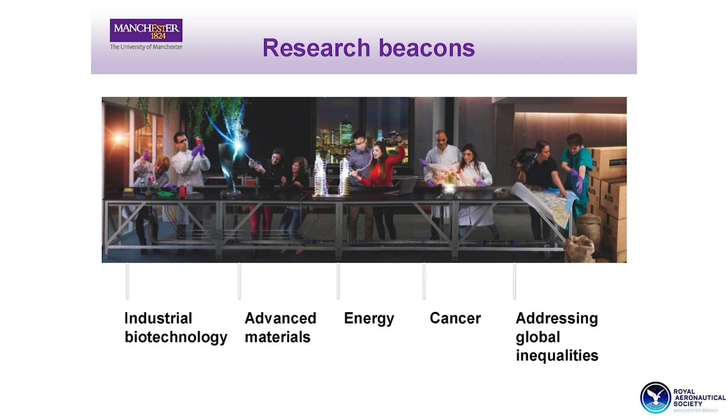Manchester, I have to say a few things about the university. It's Britain's first university of the industrial age, dating back to 1824, with 25 Nobel Prize winners. Rutherford split the atom there. Almost 40,000 students, and we have exceeded 1 billion of annual income. We have identified research beacons: industrial biotechnology, advanced materials, energy, cancer, and addressing global inequalities. But tonight we'll focus on advanced materials.

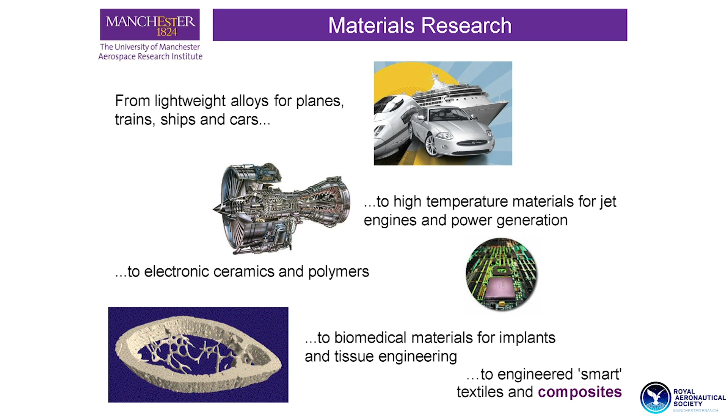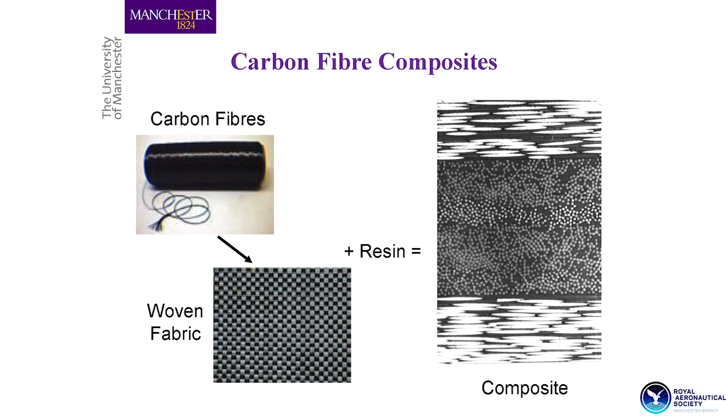When we talk about materials, we go from lightweight alloys for planes, trains, and cars, to high temperature materials for jet engines and power generation, to ceramics and polymers, biomaterials, to smart textiles and composites. But we are going to focus a bit more on polymer composites reinforced with carbon fibers, and on high performance carbon fiber composites with continuous carbon fibers that we can weave into fabrics and wet with resin in a multi-layered configuration to develop composite laminates, where we can design for strength, stiffness, and toughness. We can tailor the properties of the material system to our specific needs.

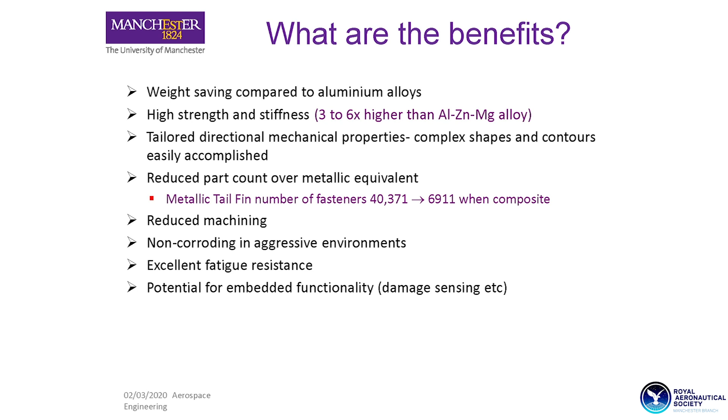Of course, what are the benefits? There are many. They are super light materials, offering high strength and high stiffness, 3 to 6 times higher than traditional aluminium alloys. We can tailor the properties, reduce the part count substantially, require less machining, and they do not corrode in aggressive environments. But most importantly, we can embed functionality, and we'll talk about that later tonight.

They are used in many sectors: aerospace, energy, wind energy, marine, construction, transportation. But compared with metallic materials and metallic structures, they're relatively new systems. The first commercial product appeared in 1983, when Dunlop produced the first commercial product, the carbon fiber tennis racket, which was an expensive item to acquire. Then in 1995, McLaren built the Formula One from carbon fiber composites.

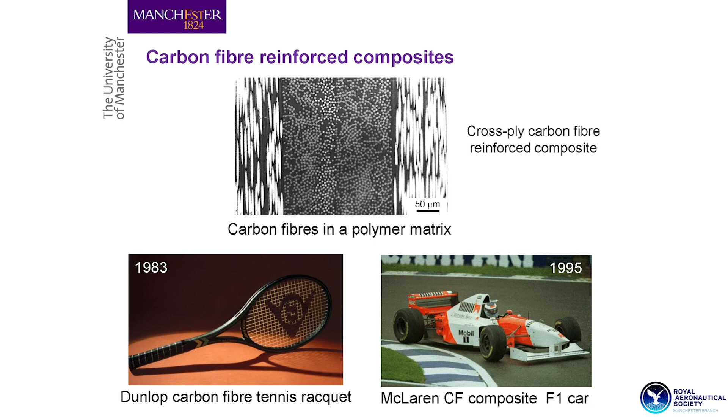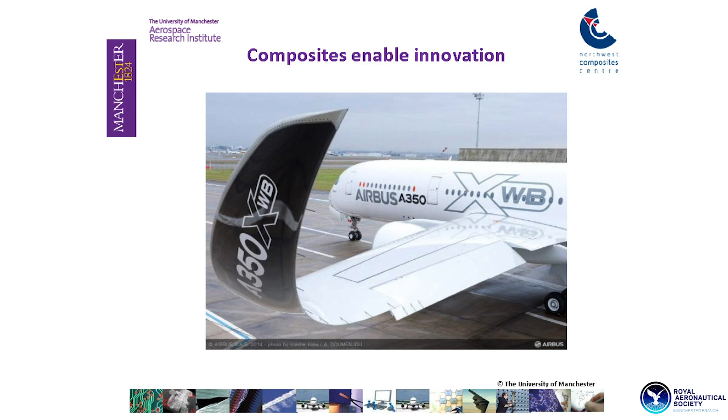The benefit of introducing composites into structures is that it enables us to innovate. We can see here the winglet of the Airbus A350. You can make this from metallic materials, but it's going to be too heavy, too costly. This part here is 7 meters, a big structure, and the benefit, of course, is that it prevents vortices from being created and enables the aircraft to be more fuel efficient.

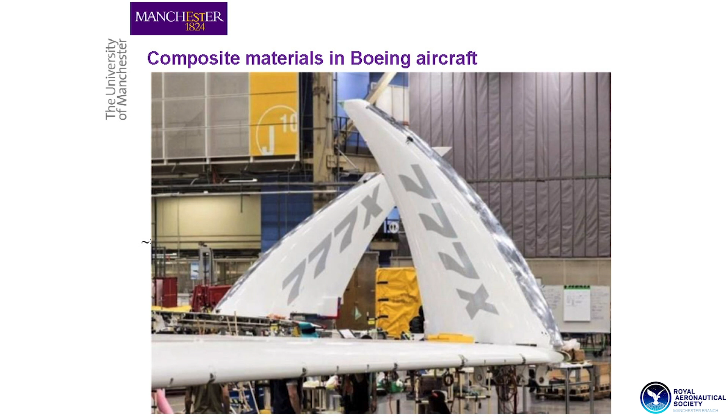Another successful aircraft, the Boeing 787, has more than 50% of its structure in carbon fiber. And the most recent one, the 777X, with the folded winglets, again 7 meters, all composite, all carbon fiber.

Why do we have those folded winglets? You do aeroelasticity, fluid structure interaction. Why do we need them? To reduce the size of hangar doors. So when the aircraft parks, the wingspan is too long and they fold the winglets. But that enables the designer to give a bigger wingspan to the aircraft, which improves the lift, improves the performance, reduces the drag, and we don't have those curved winglets that we've seen in the Airbus A350.

So how do we reduce the formation of vortices in this kind of configuration? We can discuss later.

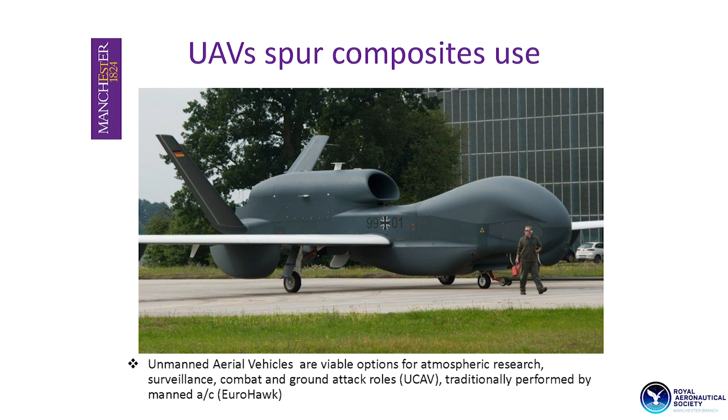And the area where carbon fibers can be used more extensively is in unmanned aerial vehicles. This is the UCAV with the German Air Force, the Eurohawk, that probably currently flies at over our airspace at about 50,000 feet. We don't see it.

And another smart aircraft, the F-35, it's all made from carbon fiber, and is one of the most advanced fighter jets currently in operation.

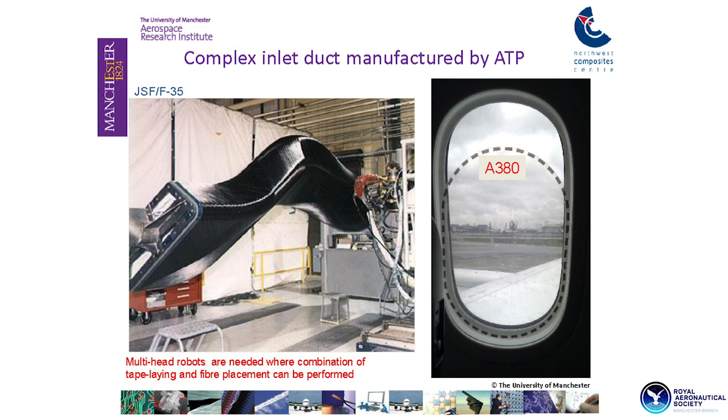And this is the complex intake duct manufactured by ATP. What's ATP? Automated, or advanced, tape placement. And it enables us to have a very complex shape that if you try to make this out of metallic materials, the F-35 will stop being smart, it's not going to be stealthy, and probably unable to take off because it's going to be too heavy.

Another benefit we get from carbon fiber composites: again here we can see that the designer of the 787 can afford to give us a bigger view of the clouds, offering a bigger window when you compare it with the Airbus A380.

Yeah, but what is the meaning of that? The bigger window, the bigger cut. Because we know the more material you remove from the structure, the weaker the structure becomes. While here we can see the design of the 787 is very, very generous, giving us more view, but removes more material.

I'll ask you later why. What was the reason behind it? What does it tell us? What does it tell us? Who's going to tell me?

It tells us that composites don't fatigue, or they don't fatigue as much as metallic structures. The Airbus A380 airframe is metallic, and metallic airframes suffer from fatigue, cracks. So does that mean composites do not crack, or composites do not fatigue? Of course they fatigue, everything fatigues, but they don't fatigue as much.

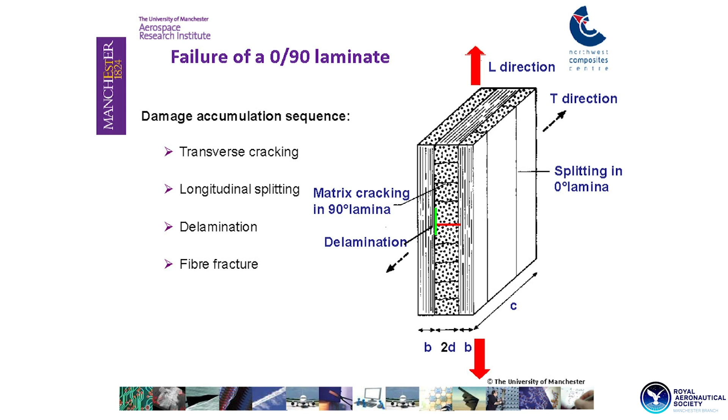And here we can see how damage develops in those laminated carbon fiber constructions. This is a very simple 0-90 layup, and if we load it along the 0 direction in tension, we're going to see cracks start to develop. These are the matrix cracks in the 90-degree ply.

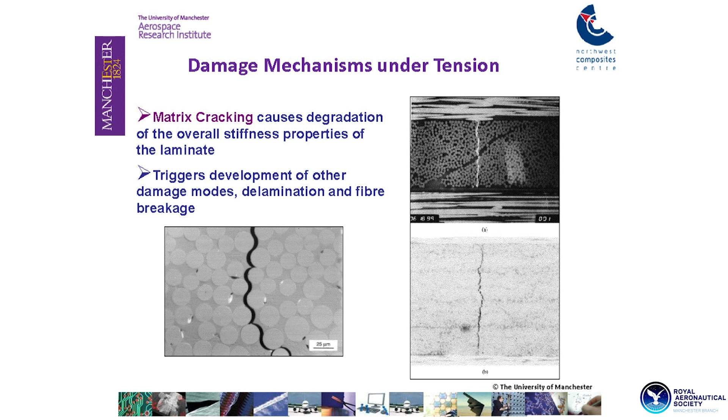Those cracks, there you are, we focus on this one. At the tip of the crack you have developed a three-dimensional stress field, very high stresses, but not high enough to break our zero fibers, but high enough to separate, to delaminate the zero layer from the 90 layer. So we have matrix cracks that trigger delaminations at the tip of the crack. Yes, they are matrix crack induced delaminations.

And then if we load it in the transverse direction as well, in addition to 90-degree cracks, we get also splits along the zero plies, which again create local delaminations at the tip of that crack.

And then of course those delaminations, when they grow, they will allow the environment to penetrate into our structure. They will allow moisture to get into our composite. Moisture will plasticize the resin, and it will reduce the load carrying capability of the composite.

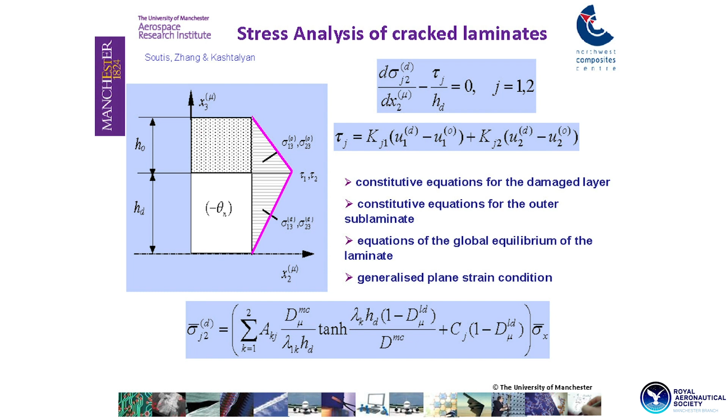And this is where I spend my time, developing mathematical models that can tell us by how much the strength, or the stiffness, or the long-term performance of the composite will be affected by the matrix cracking, the delamination, the splitting, taking into account the environment that the composite operates in.

And we said earlier that moisture plasticizes the polymer, the resin. You might say when the structure is loaded in tension, it might not be a big problem, but when it's loaded in compression, the softer resin reduces the lateral support to the fibers that carry the high stresses, and those fibers might fail in a fiber instability failure mode that we call fiber microbuckling. So although the designer has avoided macroscopic Euler buckling, his composite structure loaded in compression can still fail by this fiber instability failure mode.

And here we can see a composite laminate used in the F-35, or it can be in our Eurofighter, the Typhoon. Actually, this system is from the Typhoon. It's a typical hole for rivets, hole diameter about 6 millimeters. The skin is about 3 millimeters thick. How many plies? It's a carbon epoxy system, autoclaved, manufactured, so it's about 24 plies.

24 plies, ply thickness 0.125. And it's been loaded at about 90% of its ultimate compressive strength. We don't see any damage. We might see probably some kind of few micro cracks there, but probably they were introduced during the drilling process of the hole.

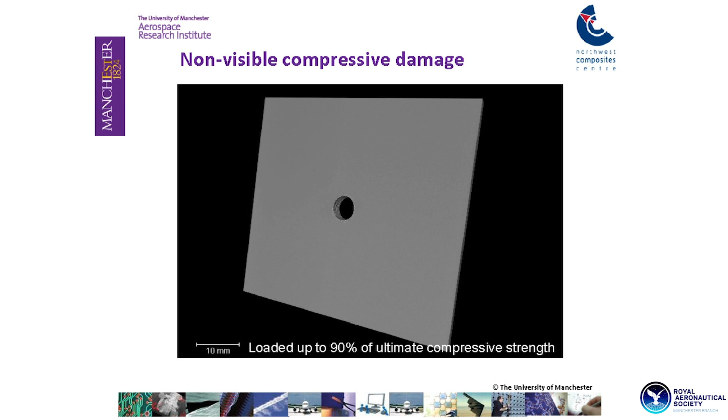Again, if the operator that drills the holes is not careful - and I've been to factories where I've watched the technical people drilling holes - they create local delaminations, and then the guy behind them with a pot of resin comes around and fills the gaps up with resin, and I tell them, sorry mate, it's not going to work, already the laminate has been delaminated. And this is what's inside.

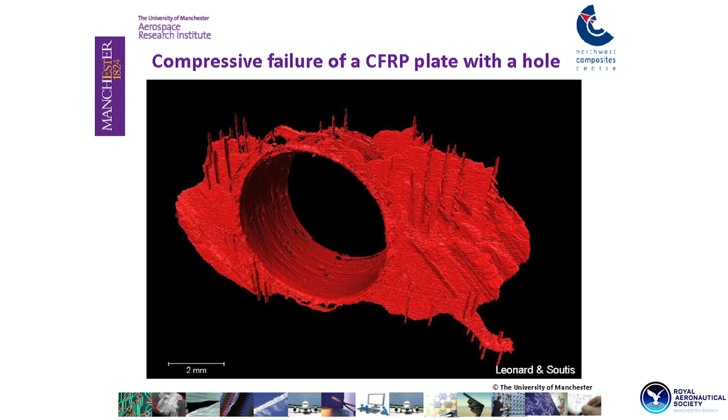Extensive amount of damage in the form of the splits that we've seen earlier, the off-axis ply cracks in the 45 plies, and those delaminations that start and follow the path of the crack.

If someone has a well-trained eye, this is an X-ray CT, X-ray computed tomography, and we're going to see something is happening there. What's happening is that the fibers, the actual fibers that carry the compressive load, have lost the lateral support, so the neighboring layers have delaminated, they don't support the zero plies anymore, and the fibers buckle at the microscopic level. That's the crack, and this is the fiber microbuckling. This is the axis that we load the plate, and this is how they break.

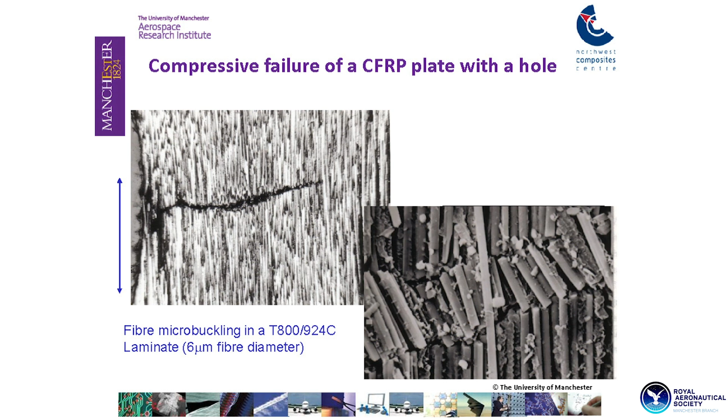Fiber diameter is about 6 micrometers, so this length here is about 10 fiber diameters. When that crack reaches a critical length of about 2.5 to 3 millimeters, depending very much on the layup and the stacking sequence, it propagates catastrophically and you cannot arrest the crack.

So the challenge we have is to identify non-destructively that damage that happens inside, identify what's the critical length, and predict or estimate when that laminate is going to ultimately fail.

If you had a metallic plate, the free edge is stress-free. You have no stresses. In the composite, you have a three-dimensional stress field, and this component of interlaminar shear will destabilize further the wavy fibers, triggering microbuckling at a lower applied compressive load.

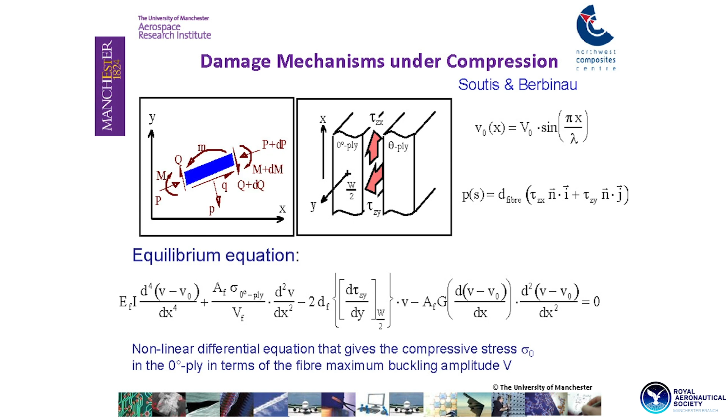And here, this is the properties, the shear modulus of the polymer that supports the fibers. It's not a constant value, but it varies with the applied load, so it takes into account the entire nonlinear response of your polymer.

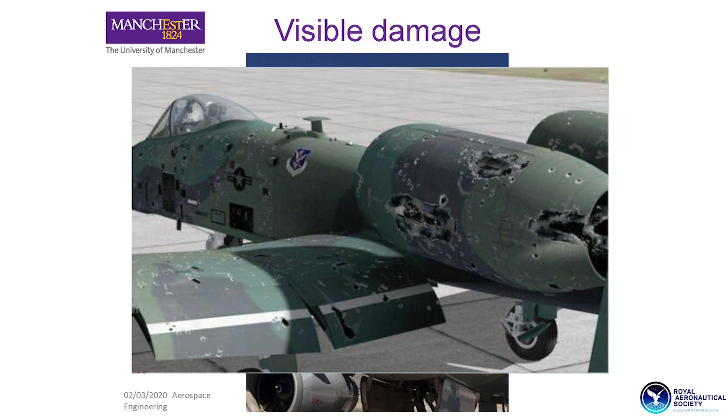That was the invisible damage that we cannot see and will struggle to identify non-destructively. This one, we don't need NDT or SHM—we can see that there is big damage. There is big damage. And this one also has suffered lots of big damage.

What's special with this? What does it tell us? It tells us that this aircraft can suffer lots of damage, yeah, but can still perform its functionality. It didn't fail, it didn't collapse. They didn't manage to destroy it, or it didn't fail catastrophically. The pilot managed to land the aircraft.

So the challenge is how we can design and build structures that can still perform well in the presence of damage. Ideally, we'd like to make them first damage resistant, but once damage does occur, we want them to be damage tolerant, so they can tolerate the damage. That's the task we have—how we can make the structures damage resistant, and then eventually, because everything gets damaged, once it gets damaged, can it still perform its functionality?

Here is another type of damage. Most of that damage happens accidentally. People walk along the aircraft wing of the Airbus A350, they drop their tool, and they damage it.

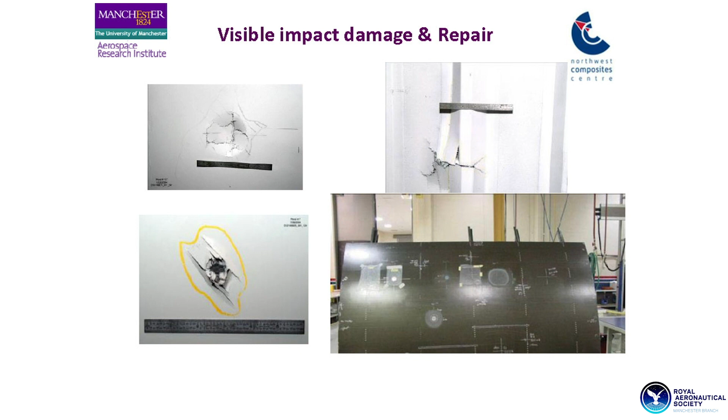Then the challenge, of course, is can we fix it? Can we repair it? In the lab, you can repair it, you can recover the shape, you can recover the strength and the stiffness, but you also have to recover what is important in aeroelasticity—the rigidity. But you can also make it too rigid, too stiff, and then the loads will redirect themselves and follow the path of the structure that's locally stiffer.

So we have to make sure we don't make it over stiff or over rigid. It's not only the static behavior we have to worry about, but also the dynamic behavior. So when we repair, say, the vertical fin, we have to recapture not just stiffness and strength, but also the aeroelastic behavior, which is a dynamic aspect.

And then the other type of damage you can get is blast. You put a few grams of explosive inside the aircraft. In this case, we were very lucky because it happened at very low height, so the pilot managed to land the aircraft, but if it happens at 40,000 feet, you cannot rescue the aircraft.

The task we have as designers is, in those critical areas where you suspect things can go wrong, to develop a material system that can dissipate the blast energy so you don't get perforation. You get damage, and in the formation of that damage, you absorb the blast energy without getting perforation.

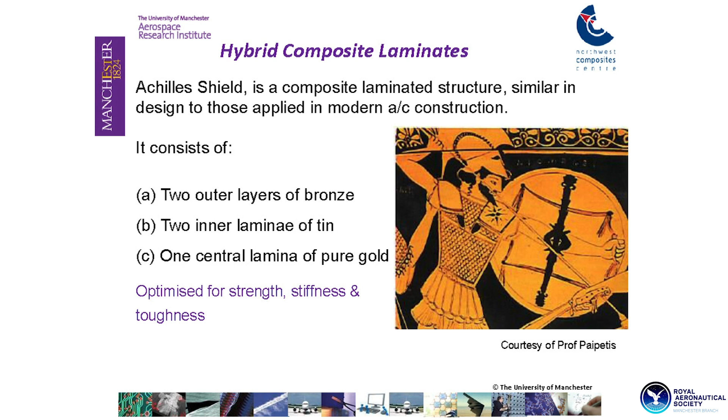So when the spear hits the shield, you don't get perforation, and you don't shatter or break in a brittle manner. Because you can have something which is very stiff and very strong, but under impact it shatters like glass. In this case, by optimizing and tailoring, you can achieve strength, stiffness, and optimum toughness.

And of course you have to perform numerical simulations to identify the best combination of different layers in order to prevent perforation of the skin of your aircraft. You also have to take into account not only the blast, but also that your fuselage is pressurized.

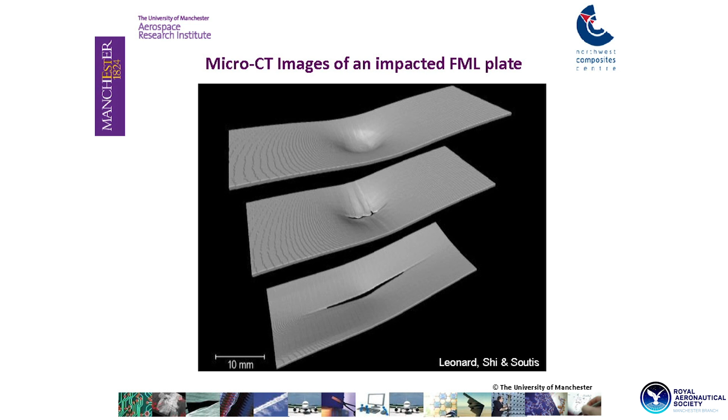This is a combination of aluminum layers, where you can see extensive plastic deformation, but not perforation. And you can see extensive cracking in the composite, but overall the whole laminate has been kept without a hole.

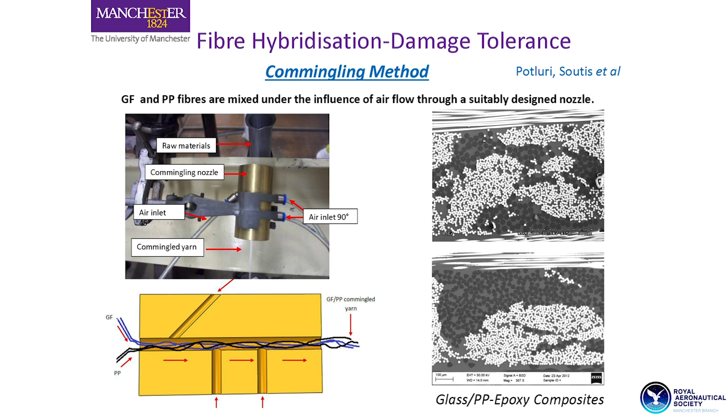Another way of improving toughness is hybridization, but this time not at the layer level, but at the fiber level, where the designer mixes glass fibers that provide stiffness and strength, and protects those glass fibers with low-cost thermoplastic fibers, in this case polypropylene.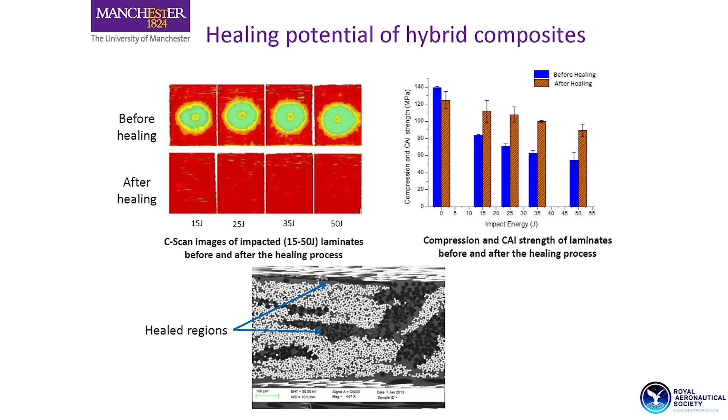In the event of impact, this is during the impact event and the extent of impact damage you get. Then if you heat up the laminate after the impact, those thermoplastic fibers melt and they fill up those delaminations and cracks, so you recover the strength and stiffness of the laminate.

And you also improve the post-failure compressive behavior of the composite. So we have hybridization at the ply level, and hybridization at the fiber level.

Another way of preventing brittle fractures and brittle failures is by reinforcing our composite through the thickness, so you prevent the composite from delaminating at relatively low applied loads.

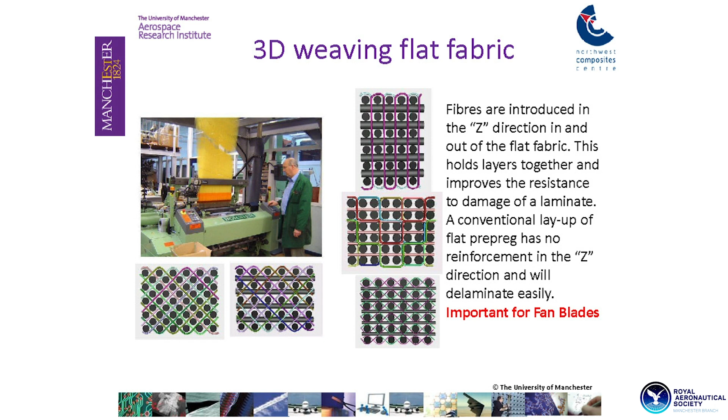The idea here is to achieve a composite system where you remove material, you damage the material, without affecting the load carrying capability of the composite. What we plot here is the tensile stress versus the axial strain for the undamaged material and the damaged one.

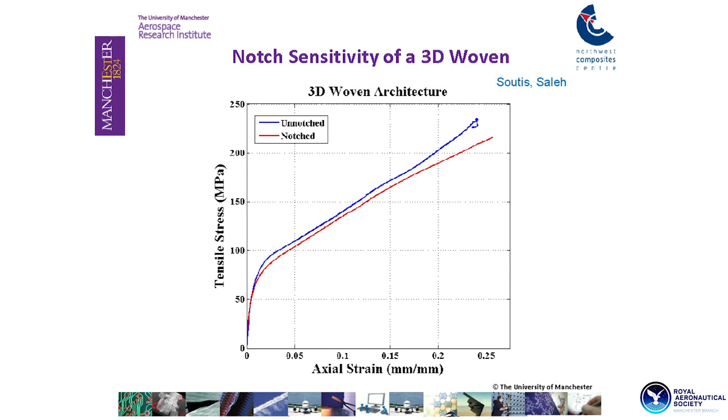Because usually when you have a piece of material and you make a hole, you remove material, it becomes much weaker.

Well, here we see we have removed material, but the stress strain response has not been affected. This is what we call, if we go back to the A10 aircraft, the Warthog, the wild pig. We can see that you do have perforations, you do have holes, you have removed material, but the structure is damage tolerant. It doesn't feel the pain.

So we have spoken about hybridization at the ply level, hybridization at the fiber level, and we introduced the through-thickness fiber reinforcement that makes our structure tolerate damage.

But the talk was about graphene, wasn't it? So let's see what graphene can do.

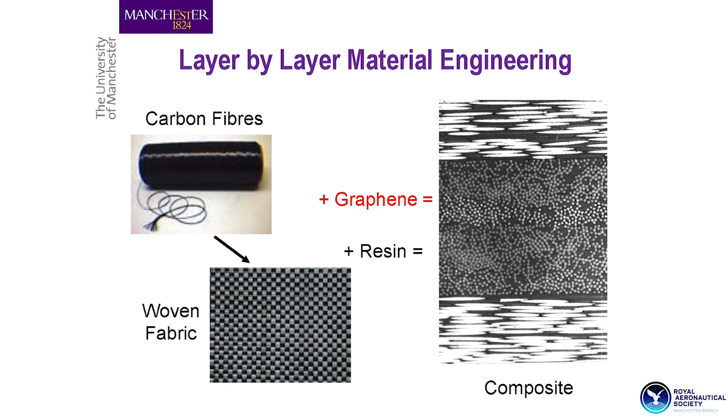And here we are, we have our carbon fiber, we have the woven fabric, we have our resin, but this time we put some graphene there. And what kind of expectations do we have from that graphene? Improve our resin, make our resin harder to crack, maybe make our laminate more difficult to delaminate.

Let's see. Maybe I can give you also something that you can take home with you.

You can have a white part, and you can have a black part. You can circulate, and later on, at the end of the lecture, you can have your own with and without. So the white part is without graphene, and the black part is with 1% graphene, or less than 1%, probably 0.5.

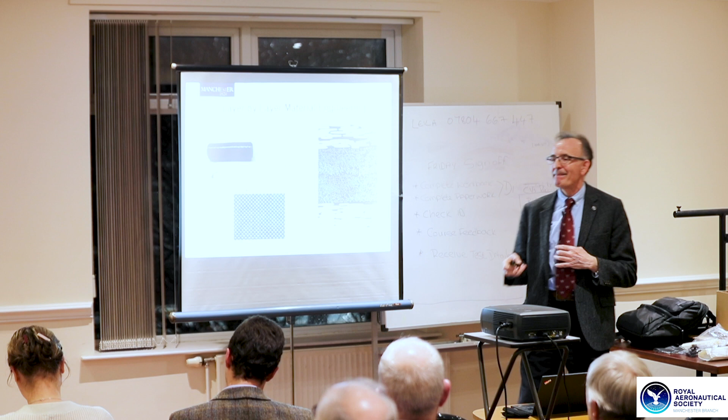And that graphene, what it does, it improves the impact performance, the fatigue resistance. It gives us better wear resistance, but also it can sense.

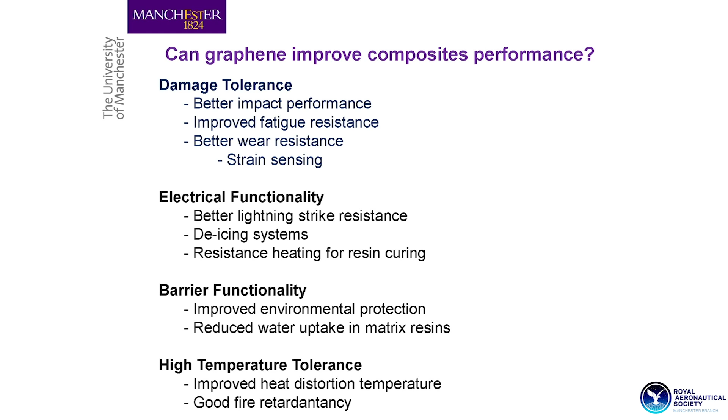So when the aircraft mechanic drops the spanner on the composite wing of the Airbus A350, if you were the mechanic, would you report the incident? She would, because she's a good guy. But the bad guy wouldn't report it because he will get into trouble with his line manager. Because the line manager will say, now we have to fix it, we have to do the inspection, we have to find out if there is damage inside that we cannot see with the naked eye. So we have to stop the flight to inspect the aircraft. But if you have sensors inside that skin, you don't need to ask the guy who dropped the spanner. It will be recorded automatically and will be reported automatically.

But of course, where graphene really can make a huge benefit is on electrical functionality, environment protection as well, high temperature tolerance. We can improve also the coefficient of thermal conductivity. We can make the polymer to be thermally conductive. Why do we need that? We'll see later on.

But first of all, let's say, what is graphene? Are we all familiar with graphene? Yes, almost. So it's a two-dimensional material. Why do we call it two-dimensional? Because it's super thin. How thick is it? 1 atom thick.

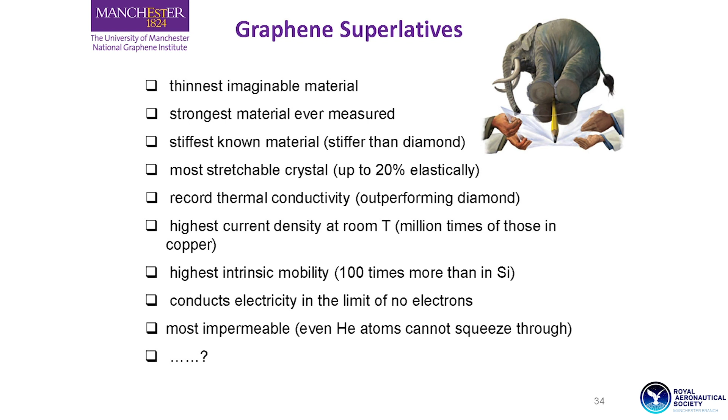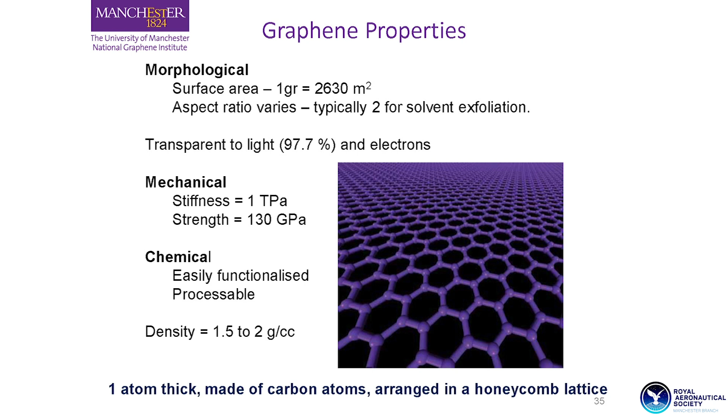And some graphene superlatives that you can find in magazines, newspapers, and people in Manchester talking about: the thinnest imaginable material, the strongest, the stiffest, the most stretchable material, the highest current density at room temperature - 1,000,000 times that of copper. It conducts electricity, heat, and so on and so forth. It's a lengthy list of good things.

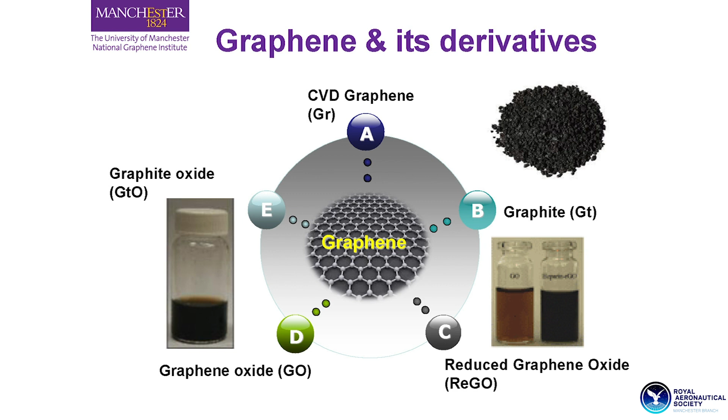But we have to make it first. How do you make graphene? One way is top-down, where production is by removing elements from a large starting material. So you have a large block of graphite, and with your little hammer you start removing the graphene. So you have the top-down method, and you have a bottom-up method, where you structure your graphene into the material atom by atom.

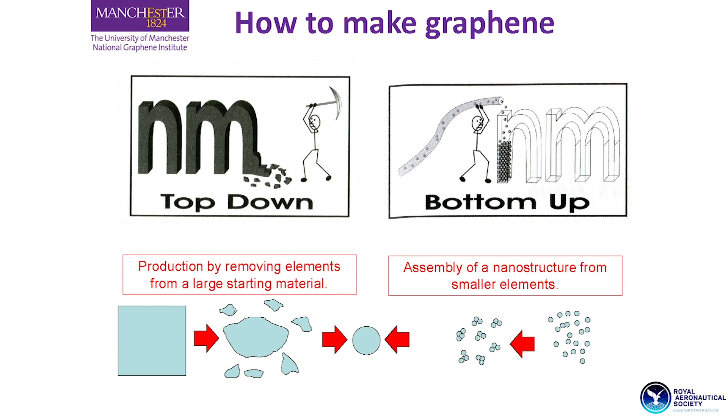So we can do electrochemical exfoliation. This is a method developed at the University of Manchester - gram-scale production of graphene using electrochemical exfoliation. The Nobel laureates, of course, used the Scotch tape exfoliation technique. They took sellotape and they started removing layers. And luckily enough, they were successful and they received the Nobel Prize for Physics in 2010.

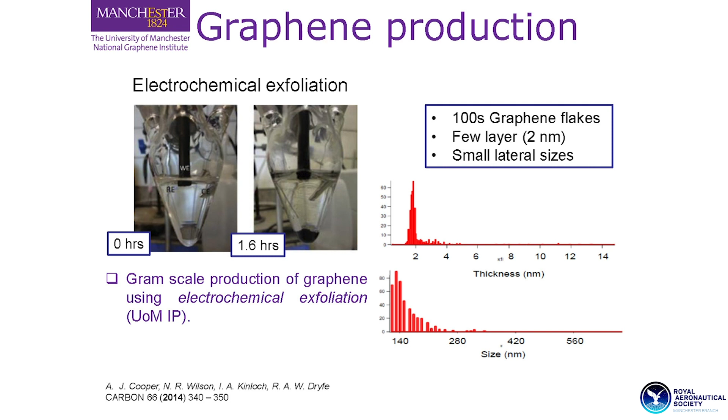So you get hundreds of graphene flakes, a few layers thick, but they come with variable sizes and variable thicknesses. And that might affect performance. The other way is with chemical vapor deposition, where you have a substrate of copper, annealed copper at 1,000 degrees Celsius, and you grow graphene layer by layer, atom by atom, at 1,000 C.

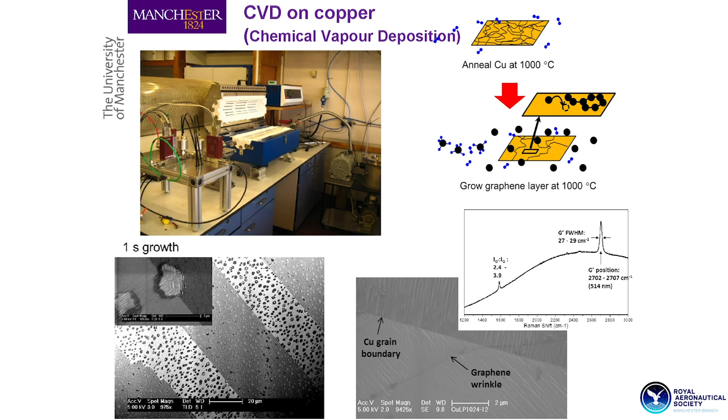It takes about 1 second for that graphene to start growing on the copper substrate. And of course, you have to scale up the production method. Then once you have produced your graphene successfully, you have to characterize it and measure those properties.

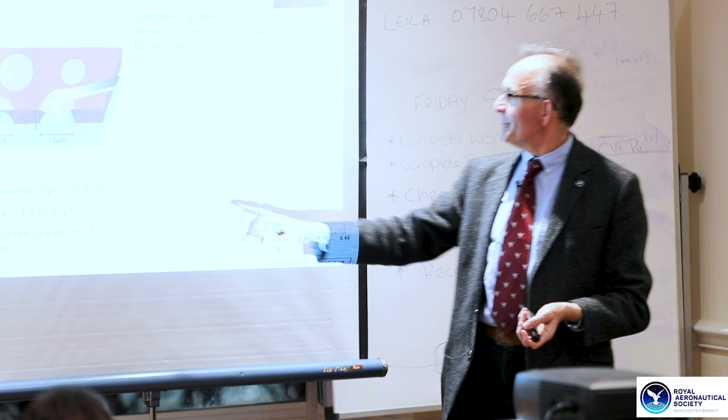You take that flake of graphene and use the atomic force microscope to perform a 3-point bending test. You extract the stress-strain response and measure the Young's modulus, which comes out as 1 terapascal, and the ultimate strength of 130 gigapascals. How is that? 130 gigapascals.

What do you understand by this surface area? 1 gram of graphene is 2,630 square meters. What is the physical meaning of that? Who's going to give me a good example? Some of the younger generation, what do you understand by that? Surface area is 1 gram is 2,630 square meters. Exactly. So with 2 grams, you can cover the whole stadium of Manchester United with graphene, and our players can play on a graphene field. We can cover the pitch of Man United with 2 grams of graphene.

And it's transparent to light. I'll circulate this to you. It's a black bin bag - no, it's not. It's been reinforced with 0.1% graphene. It's a cheap polymer reinforced with graphene, which means you can produce coatings, many things, films - plastic films with special super properties. We'll see what kind of applications they can have later on.

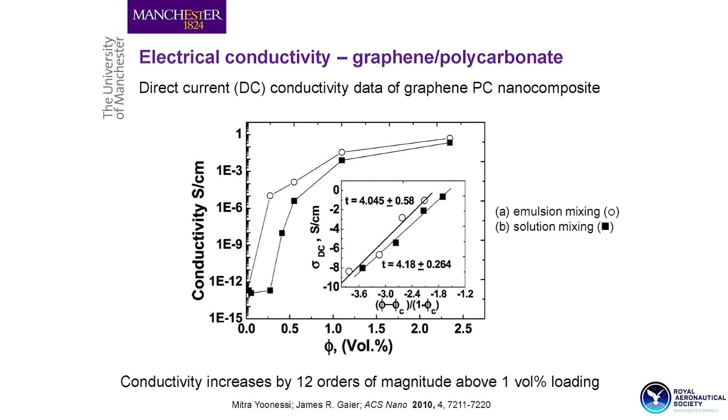So you characterize it, and then you measure electrical properties, and we can see conductivity. Conductivity increases by 12 orders of magnitude. So you have a polymer which is not electrically conductive, and suddenly, with a small amount of graphene, it conducts electricity.

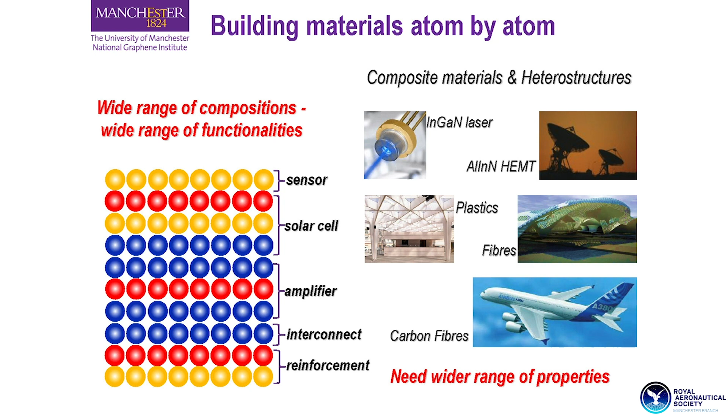We've seen at the beginning of the lecture that we can build composite systems layer by layer, but with graphene, it enables us to build materials atom by atom. Some of those layers can be the sensor, some others can be the solar cell where you store energy, and that energy runs the whole system with the amplifier and interconnects all these layers. Some other layers can provide the reinforcement, giving us the stiffness and the strength. So instead of building layer by layer, we can go down to atom by atom, and each layer can have different functionality.

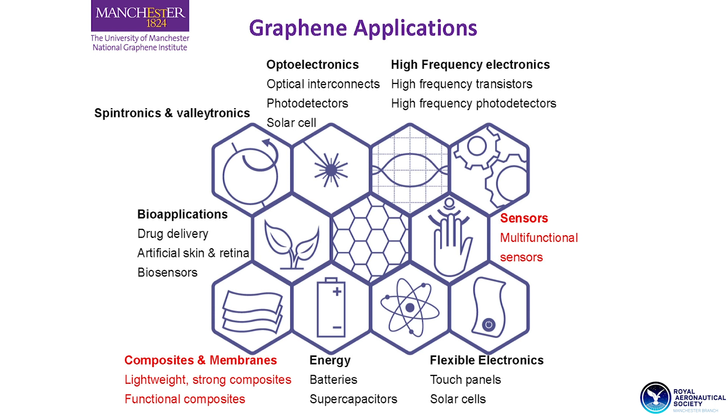And then if you start thinking of applications, there's optoelectronics, high-frequency electronics, sensors, flexible electronics, batteries, and of course the traditional composites and membranes and lightweight construction for high-performance applications.

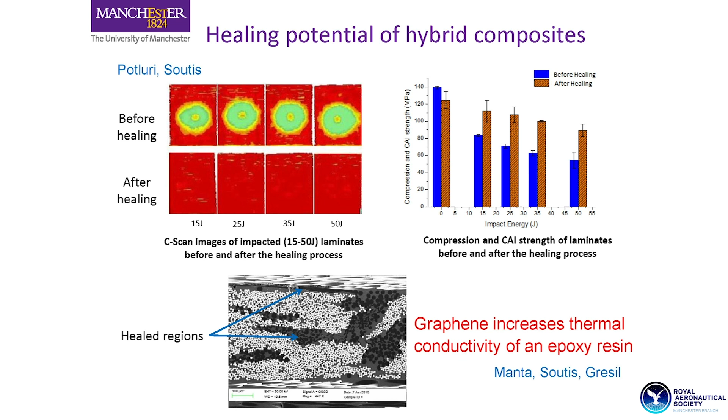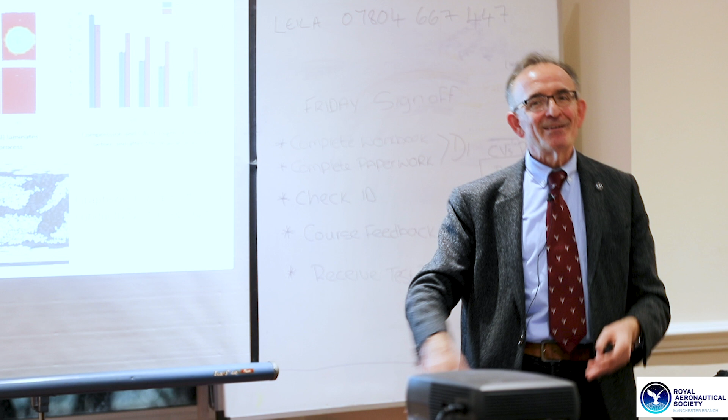Let's go back to one of those applications. Remember when we did the hybridization at the fiber level, where we used thermoplastic fibers to protect the brittle glass fibers, giving us high strength and high stiffness. By heating up the polymer, the thermoplastic fibers will melt and fill up the cracks. But if your polymer is not thermally conductive, exposing it to very high temperatures might cause damage. If your polymer is modified with graphene, which improves thermal conductivity, it becomes much easier, at lower temperatures, to melt those thermoplastic fibers and repair your composite structure.

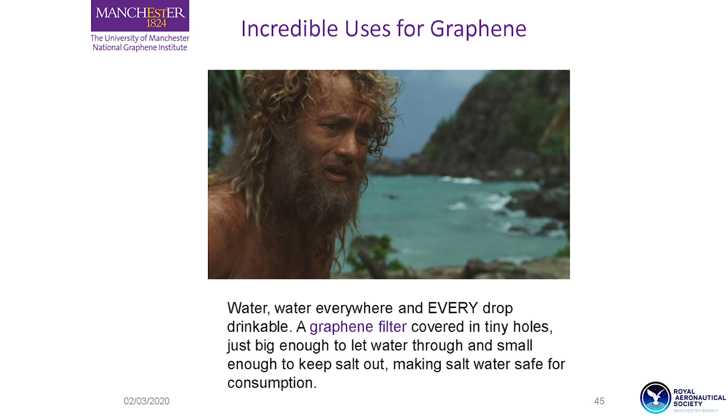Another application is filters - graphene filters covered in tiny holes. I don't know if you remember the microstructure of graphene, it did have holes. Those tiny holes are big enough to let water through, but small enough to capture the salt. So the next war in the Middle East is going to be not about oil, but about water. If we can provide a solution, then we're in good business, aren't we? So start investing in graphene filters.

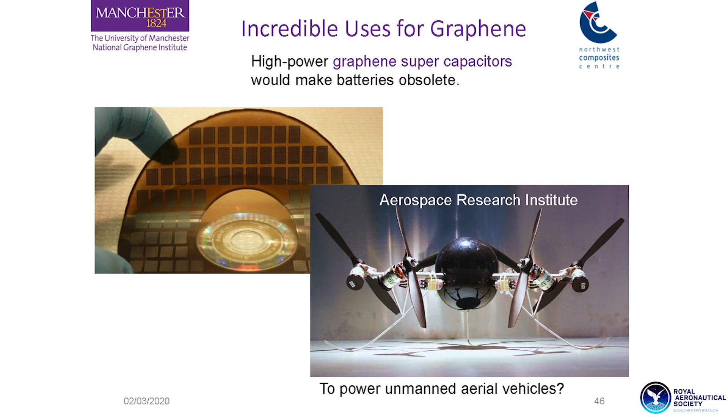Another incredible use for graphene is high-power graphene supercapacitors, so you can fly your UAV forever instead of 5 or 10 minutes until your battery runs out.

And we relate this back to what? What was the first slide of my talk today? The gowns, the gowns, that's it. Thank you so much. Are you fast asleep here?

That's for Claire, she always feels cold, you know. She can get her first. I mean, at the moment, the jacket is 525 pounds. But you'll be able to say, I have a graphene reinforced jacket.

But we're here tonight to talk about airplanes anyway, and we've seen those composite airframes, carbon fiber airframes. How do you protect them from lightning strike? Because those polymers are not electrically conductive. How do we solve the problem at the moment with the A350 and the 787? What do they do, Nick?

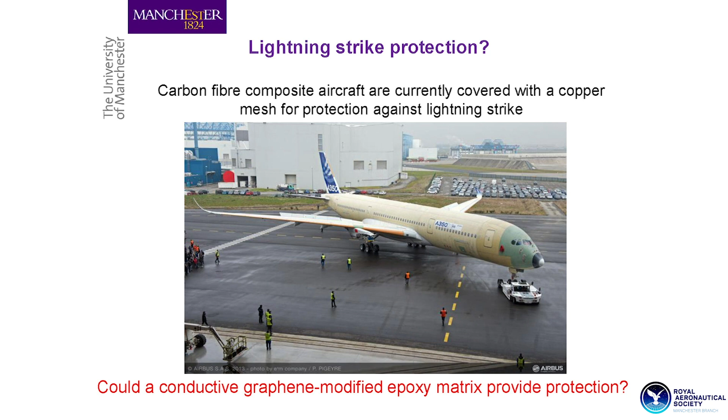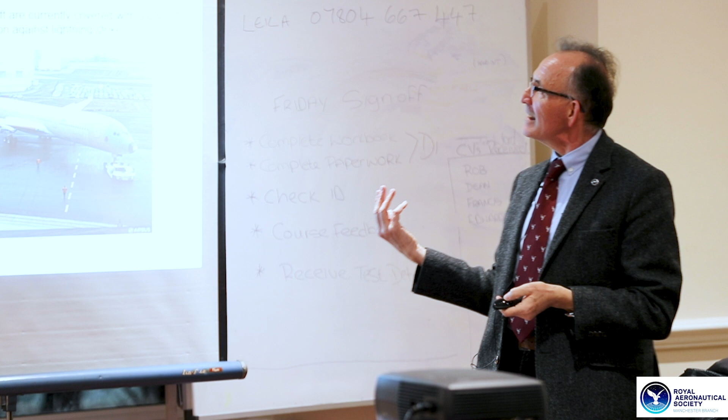Yeah, it's heavy. So we remove the metals, we replace them with composites, and then we put metal on top in order to make them conductive. So the idea is how we can cover the Airbus A350 probably with a conductive graphene modified polymer to remove that copper mesh.

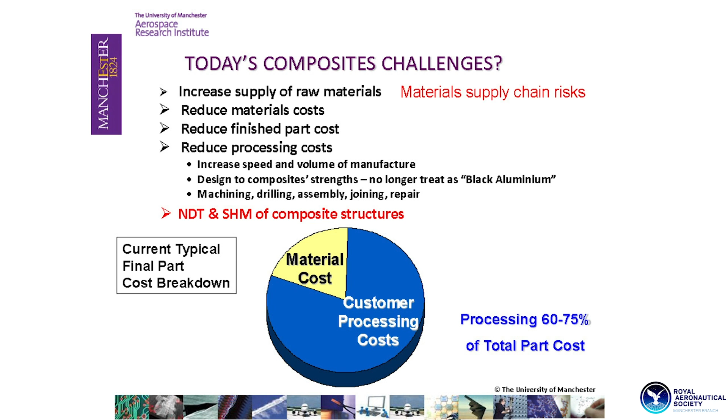Drilling, of course, is an aspect we briefly spoke about. Joints, bonded joints, bolted joints, riveted joints. Machining, drilling, assembly. NDT: we need to develop reliable, non-destructive test techniques and real-time structural health monitoring to observe those cracks, micro cracks, how they initiate, how they grow, how they interact and create delaminations, and eventually introduce fiber breakages, fiber instabilities, and catastrophic failures.

Material supply chain — where your materials come from. Can you still have access? Who controls the flow of those raw materials?

When we talk about graphene, how do we know that this is graphene? There are so many derivatives of graphene that don't have those super properties we spoke about, the terapascal stiffness or the 130 gigapascal strength. If it's not pure graphene, and it's graphite, you don't get those super properties, or reduced graphene oxide, or graphite oxide. So there are many derivatives. We need to develop test methods and ways of identifying the purity of the material we are producing. Otherwise, we don't get those super properties — the electrical, the thermal, the mechanical, the toughness we spoke about earlier.

Like all carbons, the manufacturing route determines the properties and cost. Currently, the cost of graphene has dropped dramatically — 1 kilogram of graphene is about 250 pounds. But 1 kilogram is a lot, because with 1 gram you can cover the whole of Man United. You can imagine what you can do with 1 kilogram. But the thing is, how do you know that it's graphene? You can go on Google, order your 1 kilogram, pay your 250 pounds, the graphene arrives — how do you know it's graphene?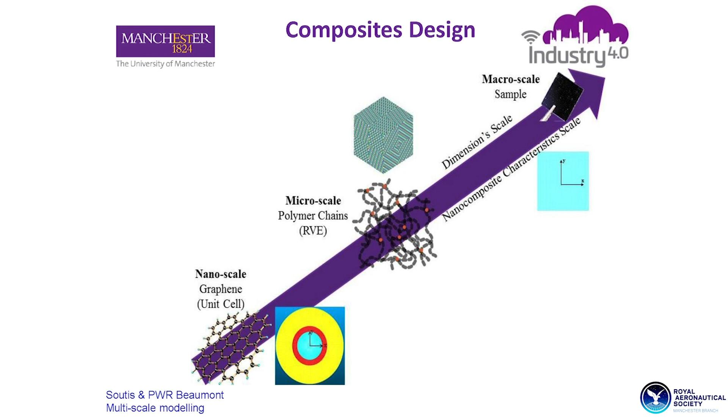And of course, the other thing is the modeling aspect. We need to characterize them not by breaking, but by performing the analysis first — at the atomic level, at the nano level, the micro scale level, the macro scale, and the structural level. So we need mathematical models that will enable us to estimate the long term performance, or to design and optimize the strength, the stiffness, the electrical conductivity.

And then we talk about Industry 4.0. Here we have cyber-physical systems that will enable us to do all that modeling in one go — automation and data exchange in manufacturing. It includes cyber-physical systems, the Internet of Things that you have heard of, and cloud computing.

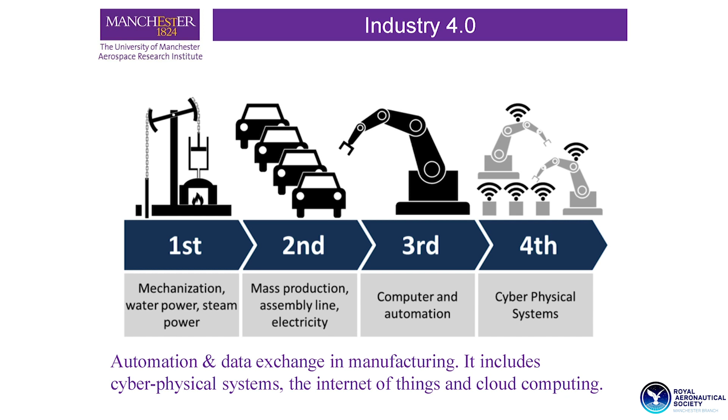But in order to run all this, what do we need to have? At the moment we're talking and struggling to introduce 5G, but our competitors are moving on and they talk about 6G. What does it mean, 6G? Terabits, milliseconds — so you can download the whole of Netflix library in seconds.

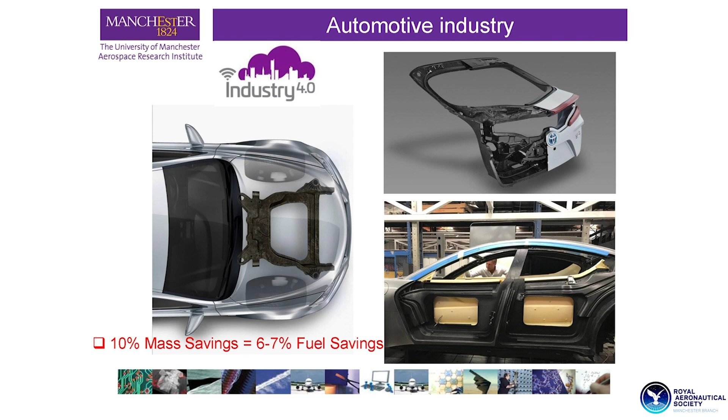Of course, the automotive industry uses robotics extensively, and introducing composites into the automotive industry — 10% mass savings translates into 6 to 7% of fuel savings. So that's another good reason to transfer technology from aerospace applications to all other means of transportation.

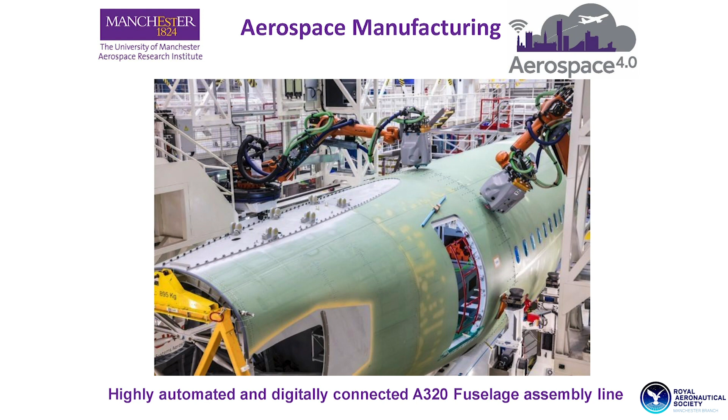And while until now the aircraft industry is all handmade, here we can see the introduction of robots doing the airframe of the Airbus A320. This opened just before Christmas — it's the highly automated and digitally connected A320 fuselage assembly line in Hamburg. So it's all computer controlled.

Maveric, they call it. What is Maveric? What does it stand for? This model is 2 meters long by 3.2 meters wide. Maveric — Model Aircraft for Verification and Evaluation of Robust and Innovative Control.

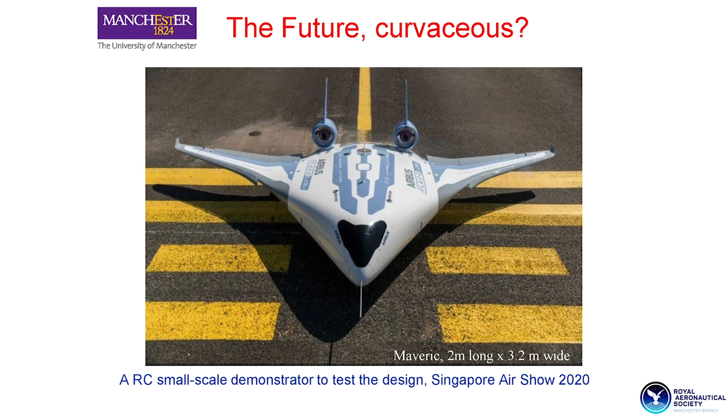And why do we need the blended wing body? Many drivers for the future design — greener, quieter, safer. The current design is more than 70 years old, the cigar type — you have a cigar and you attach wings. The body doesn't create lift. Now the whole fuselage generates lift, which reduces the drag, reduces emissions, and you need 2 engines instead of 4 engines.

But of course there are many challenges, and the main one is that aerospace and aircraft design is very multidisciplinary, integrated design. You cannot rely on one designer and say I'm going to design and build that next generation of aircraft. You have to bring teams from different disciplines — trim and stability, takeoff, cruise and landing, manufacturing, public acceptance, evacuation — so many parameters to consider. That's why you need those multidisciplinary teams to come together, exchange ideas, interact, and build the next generation of aircraft.